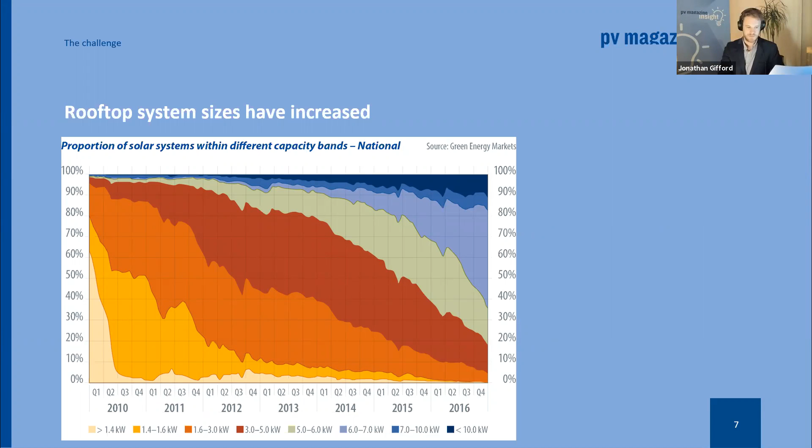And of course, as we know, rooftop system sizes in Australia have been increasing pretty rapidly. This is a historic chart again from Green Energy Markets, just showing how systems are going bigger. People are maxing out their rooftops. More and more small businesses are turning to solar for their energy, and some of these smaller systems that were installed under the various state feed-in tariff schemes are very much phasing out, a thing of the past. So this is all great news. Systems are getting bigger. We're installing more solar than ever before. But this is also the question: what kind of liabilities does that result in?

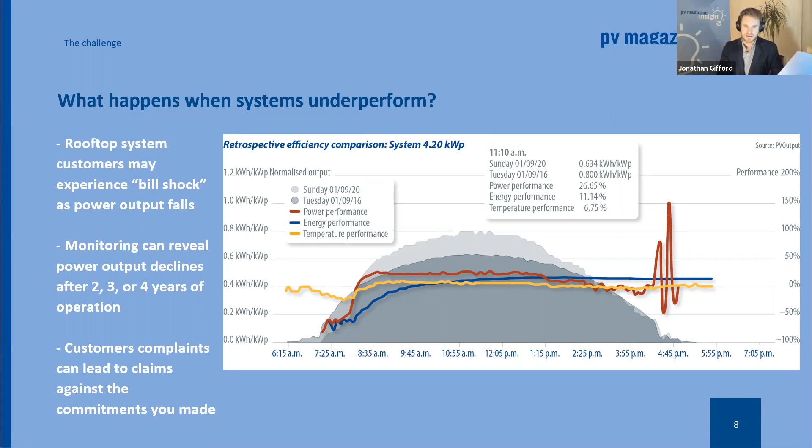So what do you do if this customer, maybe they get a shock on their bill, they're not monitoring closely, maybe they are monitoring closely, and start to see their power from the PV system start to drop off? What can be done about it? How can the faults be detected? How can things be turned around?

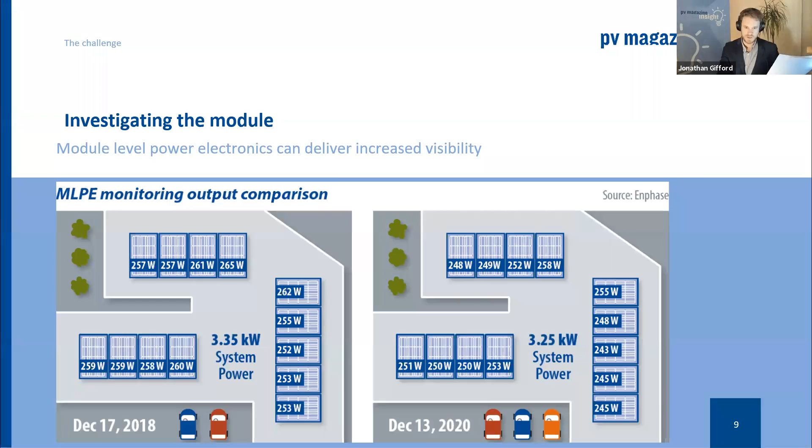Module level monitoring is a pretty powerful way of getting more insights into what's going on in the modules themselves. This is a little schemata that we've drawn up, but this is real world data. Here we can see module level monitoring on a relatively small rooftop system, but we can see over a period of 2 years that the power output from the modules is really dropping off significantly. And this is another indicator, or another level of insight into what might be happening if degradation is occurring. And we will be digging into degradation in quite a lot of technical detail throughout today.

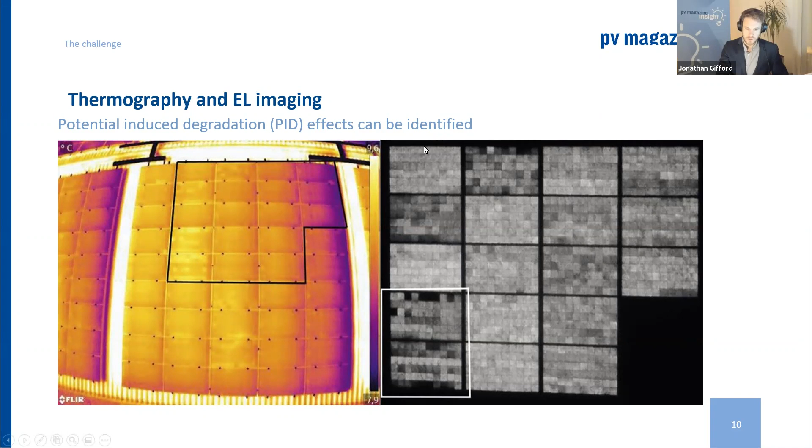Another tool that's available to installers and to our whole community in terms of fault detection and analysis is imaging, whether that's thermal imaging or EL imaging. And this is a nice example of some drone images that were taken from about 20 meters off the top of a rooftop array. And we can see how both the thermal imaging and in particular the EL imaging gives us some insights into how PID, potential induced degradation, is impacting not only a section of this rooftop array, but also a string. And I think that's really interesting to show the level of insight that can be gained from this kind of imaging.

Once again, I said we're going to be breaking down the event into 4 kind of subsections. First of all, we're going to talk fault detection and analysis and answer some key questions there. Then we're taking a really deep dive into module degradation. The module still makes up a big chunk of the system cost, and of course, that's where the power comes from. So we'll look into some different degradation effects and the latest research on one of the newer effects that we know perhaps a little bit less about. But of course, it's not just the module. We'll also look into BOS components, and we have some international experts to give you some insights there.

And then the business side of the equation. Warranties, how can we claim against manufacturer warranties or perhaps even performance warranties? The role of the distributor, key players in the Australian market. What does that mean in terms of risk mitigation and quality control? We're also going to look at liabilities and potentially the role of insurance, which I think is evolving quite rapidly in the global PV markets. Well, I did mention monitoring and module level monitoring, but let's dig into a little bit more of the data in terms of monitoring.

Our first speaker today really doesn't need too much of an introduction. I once heard one of the SolarQuotes guys say that Nigel owns shoes that are older than him, which I think is a little bit unfair, but he is very much a legend of the Australian solar industry. He now heads up business development with Solar Analytics, but he has a long history in PV production right back to the BP Solar days. Nigel Morris, thank you very much for joining us today, and I'll pass the floor over to you.

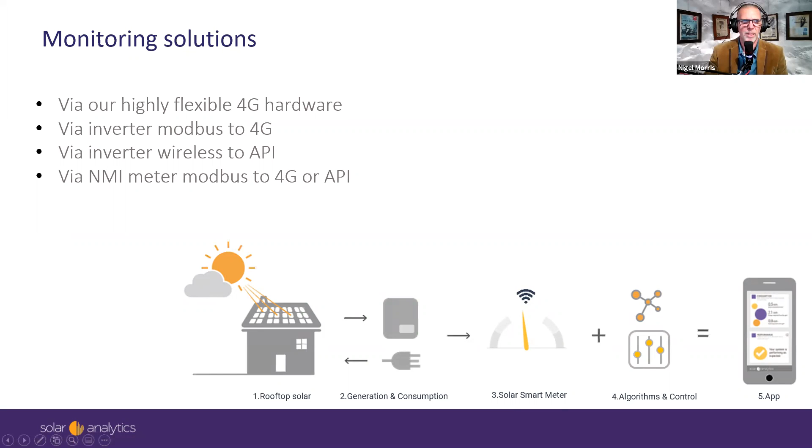And there we are. Now I've got a little control thing. There we go. My apologies.

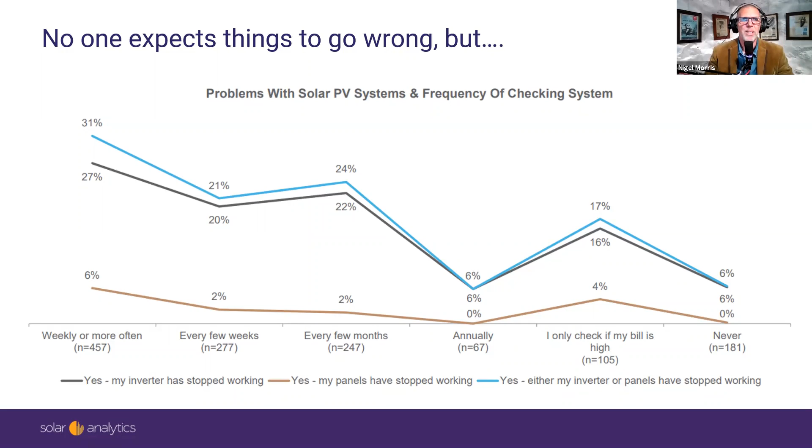I also wanted to set a scene here by going in and looking at our own fleet. In fact, the other day I downloaded a data set from our entire fleet of around 45,000 sites. It includes some very old sites and some very, very new sites. But one of the key issues here is how we determine what's going on using our own analytics and diagnostics. When we look at our fleet, we can see that about 70% are good. This changes on a daily basis, hourly basis, in fact. It's very, very dynamic. But using all our maths and algorithms and good logic, we can determine that in this case about 70% were working fine.

There are about 22% where we reckon there's something going on. We don't quite know what it is, but we can definitely detect that something's not quite normal. So we've sort of tagged them. We can see that some have comms faults, devices drop in and out from time to time, especially the older ones. And in this case, only 1% of our systems in black and white terms could we actually determine had a fault when I looked at this data. These will move from category to category as our diagnostics and algorithms do their thing, of course. But this gives you a pretty good representation.

Just to add some more qualification to this, we recently had one very, very large customer of ours with a fleet of several thousand sites who said, look, we're a bit worried that we've got some issues going on within our fleet. We've got some alerts and notifications coming out. Could you have a look? When we looked individually at their fleet, which was about 1,300 odd sites, we had almost exactly the same breakdown. So whether it's an individual fleet or the entire fleet, we see pretty common statistics. So we think this is probably indicative of what's going on out there in the market.

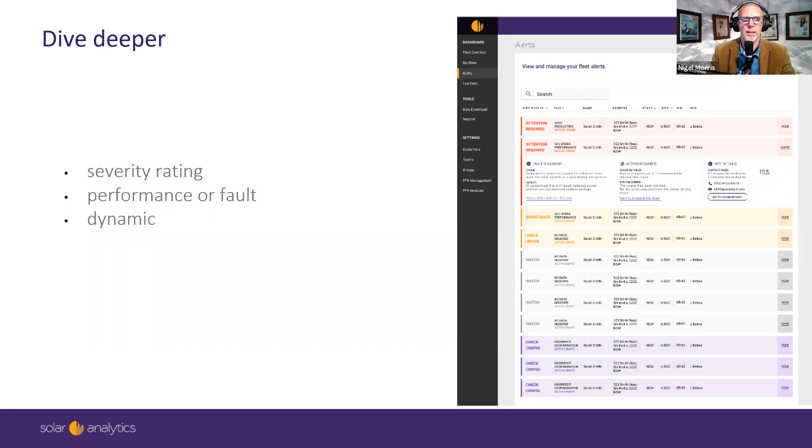And a reminder, of course, that all of these things are highly dynamic. We see faults come and go. You'll have networks that go up and down. You can have extreme weather events. We had one in Brisbane the other day, which showed up on a lot of sites. Performance is an area that we really focus a lot of attention on. And performance is really the crux of all of this.

What is normal? That's the question. What is a normal system? What should it be doing? There are around 20 variables. I'm not going to read through them all, but there are a huge number of variables that can make a system perform.

Yes, Frederic, I will wrap it up. I saw your message. Thank you. I'm going to be very quick now.

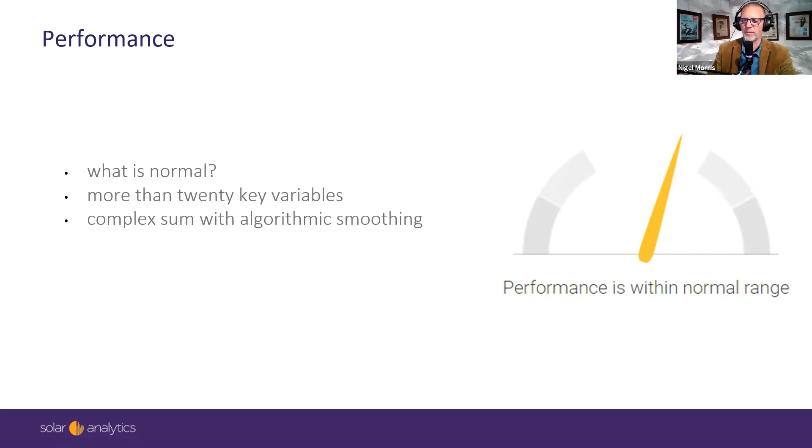So there are lots and lots of variables. There's a complex bunch of sums that we use with algorithmic smoothing and a whole lot of other things, but there are all sorts of variables that can make a normal system behave abnormally. Some are typical things that you'll see, and some are not. I'm going to skim through my slides, but obviously long-term trends are something that we look at very hard. This is an example of how we can see some of those long-term trends.

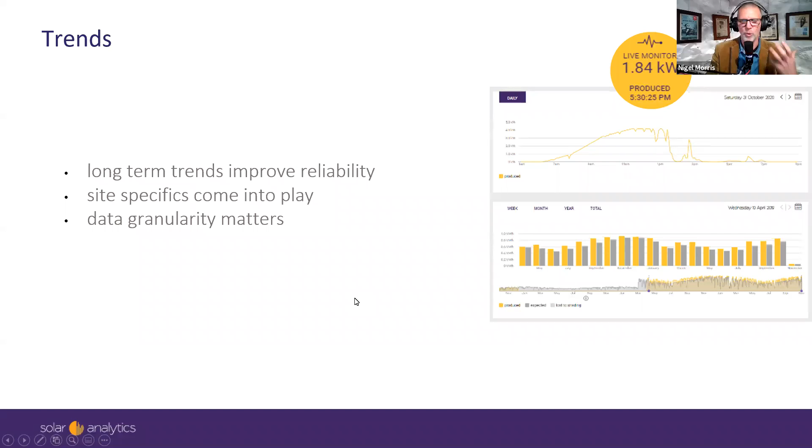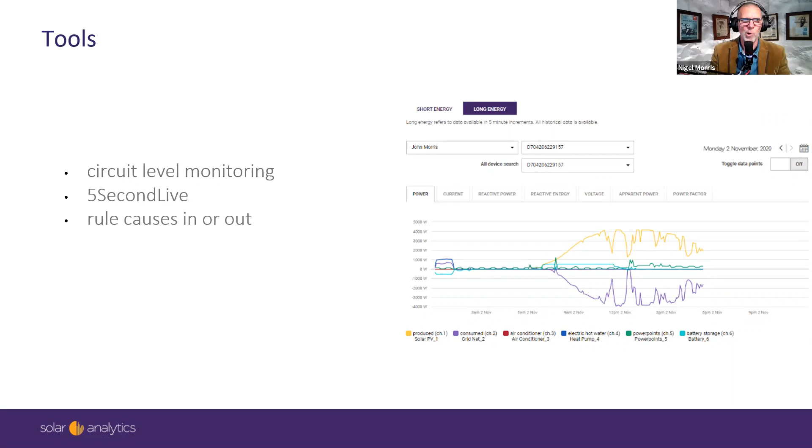Site specifics obviously come into play, and we really believe that data granularity really helps. We can go down to 5-second data as an example. We can go into circuit level monitoring. These tools can be used to help rule causes in or out, which is the key. And of course, testing solar modules, there are all sorts of variables around testing solar modules. There's equipment tolerances, there's accuracy and calibration requirements. There's all sorts of external factors that you'll hear from a whole lot of PV experts later on.

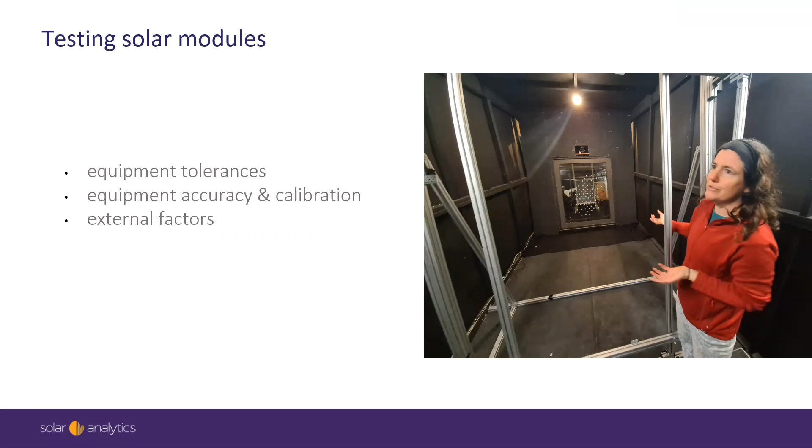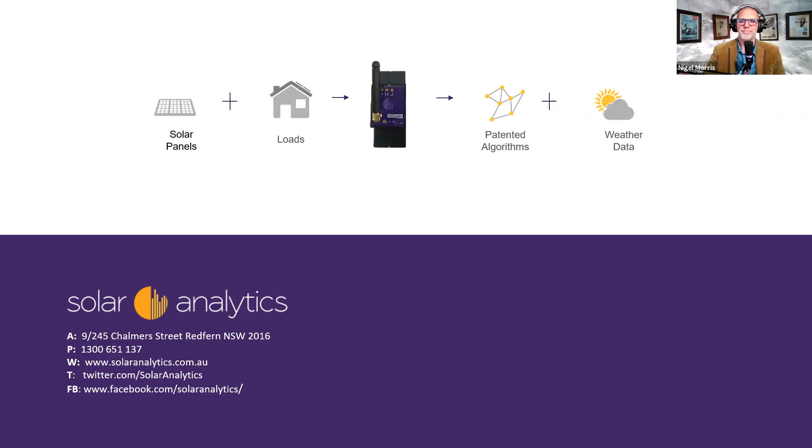Thank you, Nigel. I just see a bit of a frozen screen, but I'll keep pushing forward.

Thank you very much, Nigel Morris from Solar Analytics. So a lot of variables that can be shown up by monitoring tools. Interesting to see that the inverter is frequently a cause of failures, but let's go further into the module

while we're talking modules. Our next presenter is George Touloupas, who has a long history in PV manufacturing on the technical side, also on the technical side of project development, but now he is the Director of Technology at due diligence and engineering provider Clean Energy Associates. George joins us from Athens today. And George, you're going to provide us some insights into degradation and some of the issues that Nigel raised in terms of collecting information and making a warranty claim. George, over to you.

Hello, good morning and good evening to everyone. From Athens, it's pretty early here, but I'm very glad to be on this session, another quality roundtable, which I've been attending for the last few years with PV Magazine. Very few words. Trying to get this to advance.

On Clean Energy Associates. It's a technical advisory and quality assurance company. We've been around for more than 12 years, more than 135 professionals in 12 countries worldwide, physical presence, and a very impressive 65 plus gigawatt of track record and experience for solar and storage projects.

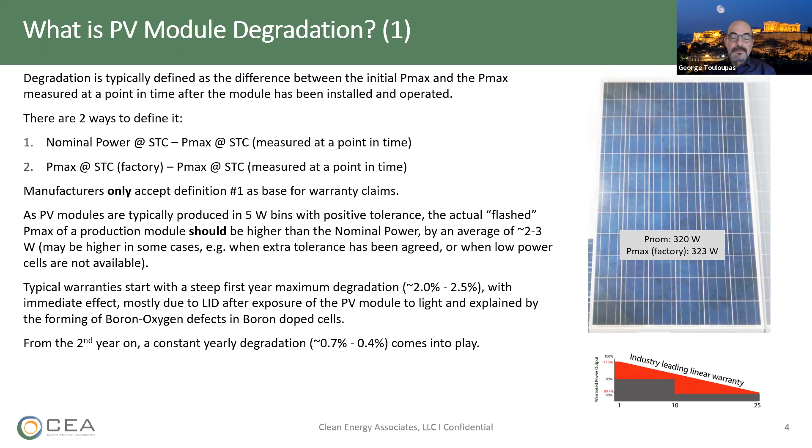But if we look at what might happen, so there's a bit of a lag. Okay. When we see a problem, we're trying to measure the power and see if we can file a warranty claim. There is this so-called measurement uncertainty, which cannot be gotten to zero, unfortunately, even if the lab goes to great lengths to calibrate the flasher and use reference modules and do all kinds of corrections, which of course increase the expense of measurement. So typically in the warranties, all the manufacturers are asking for the testing equipment, they call it tolerance, but it's really the measurement uncertainty, to be applied on top of what is measured.

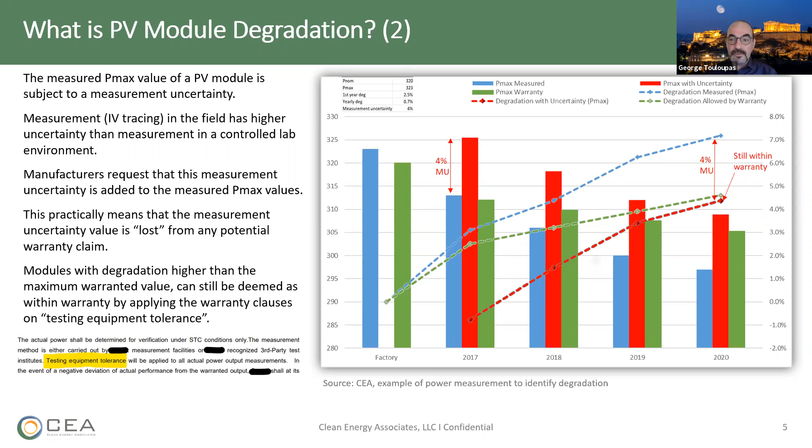Of course, 4% is pretty high, but if we are using an IV tracer in the field, it's 5% or even more. If we go to a really good lab, maybe we get 2 to 2.5%, but getting lower than that can be very difficult and expensive as well, because we have to measure quite a few modules to get that.

So why do modules degrade? It's a natural process. Everything dies eventually, including modules. It's not linear. This is an abstraction. There are lots of things that can go wrong. But of course, we have to avoid the early infant failures by doing the necessary steps. But even then, we might see degradation coming in midlife of the module. This is from IEA's PVPS document. We have added LeTID, which was not known at the time.

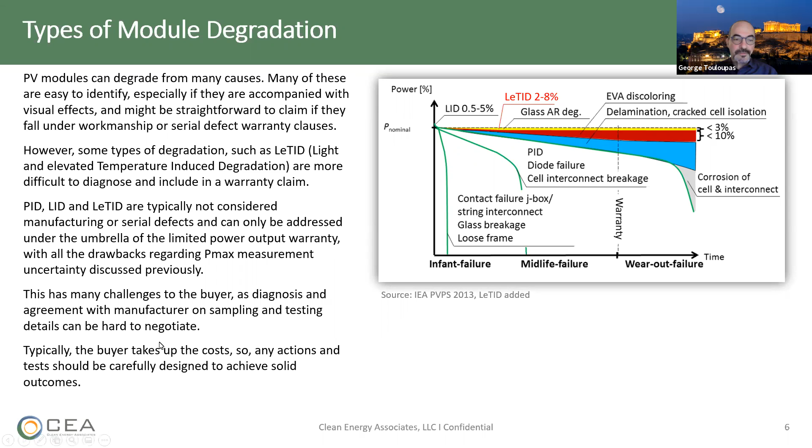And it's typically pretty difficult to detect and file a warranty claim. And degradations like all the Ds, let's say, potential induced, light induced, LeTID, are not considered as manufacturing defects or serial defects. So everything has to be negotiated, including sampling, etc., from the manufacturers. And the buyer takes up the costs.

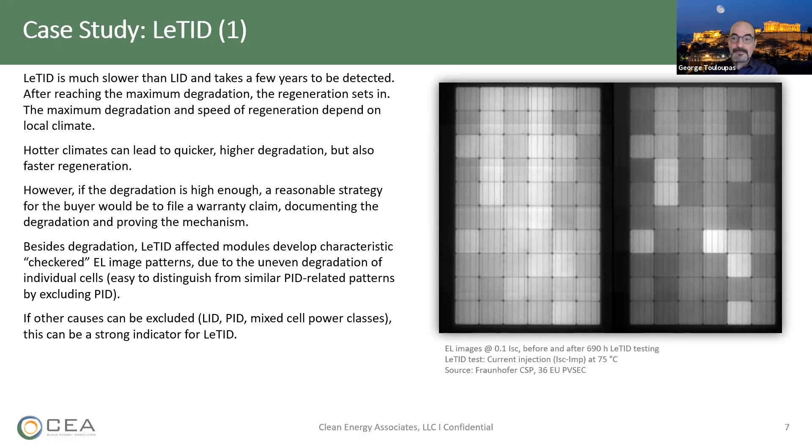So in this case study, we're looking at the buyer who has several PV plants, and we have actually found there is degradation, underperformance. We found some telltale effects where checkered EL image patterns have been detected. We have excluded PID or even LID or mixed power classes because there has been quality assurance during the production, and we've done all the testing and the checking of the modules. So everything has been excluded. So the very probable root cause is the LeTID.

And by doing some lab testing, we're able to identify that the spare modules degraded and the degraded module regenerated. So right now we're in the process of negotiating with the manufacturer on remedies. So even for very difficult degradation causes, there are ways to go around and do the diagnostics and get the warranty claim in course.

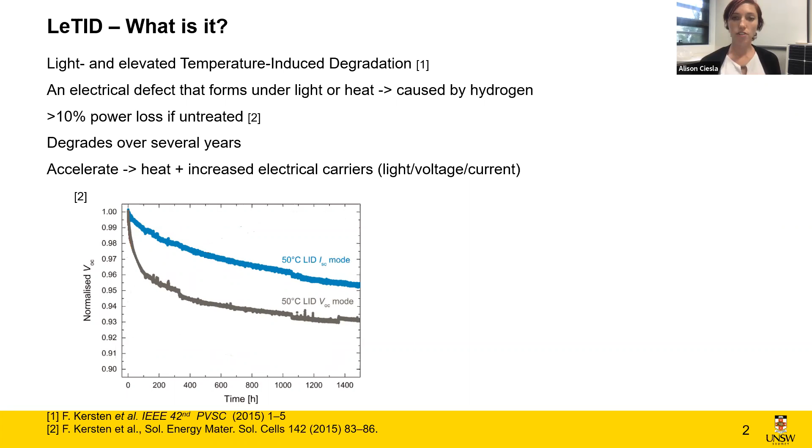So if we increase the heat and illumination, we can accelerate the degradation. So this obviously has implications for what you would see in the field in different climates around the world, but it also means we can accelerate it in the lab to look at what would happen in the long run. And when we test at higher temperatures, sorry, I'm having some troubles clicking screens, we can actually see that if we accelerate it enough, we see a full degradation before essentially a full recovery under the same conditions that cause the degradation.

So what else do we know about the degradation? It's very, very variable. Even minute changes in cell processing conditions can cause drastic changes in the behavior that we then see. So if we look at the change in voltage of these cells that have undergone thermal treatments with only 25-degree difference, you see some degrade very quickly before recovering quickly, while some degrade quickly before recovering slowly, and others just degrade slowly indefinitely.

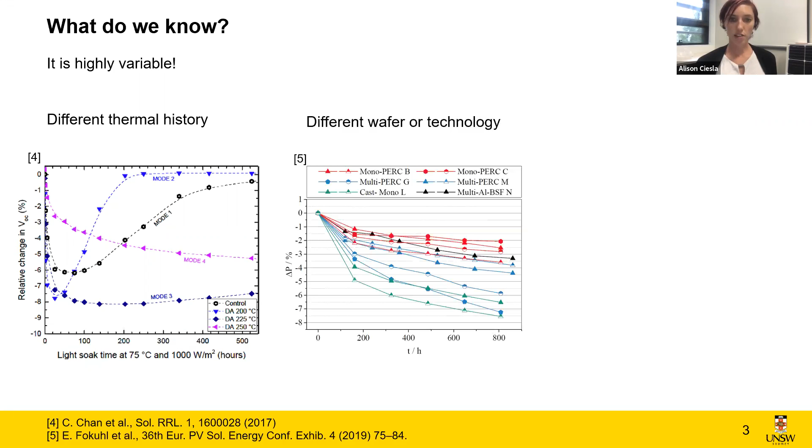So it's therefore not surprising. A recent study was done testing a number of modules that found that the degradation was highly variable between different modules made on different wafer types or different cell technologies, and similarly, very different degradation even on modules made from the same wafer type and technology.

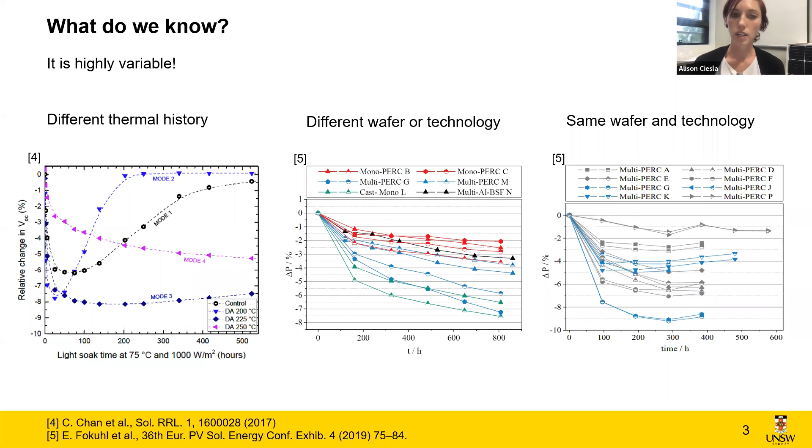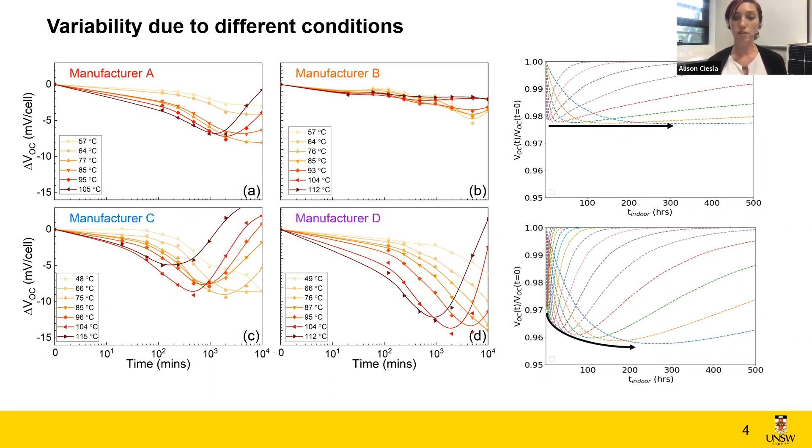It's also very variable due to different conditions. And surprisingly, I just saw in George's slides, he mentioned that with higher temperatures, we see more degradation. But in actual fact, recently what we've seen, I studied 4 different manufacturers' modules at different temperatures. These are from the market 2 years ago, so they're not the most recent modules. But what we saw is that some of the modules showed the same amount of degradation no matter what temperature they were tested at, and some actually showed increased degradation at lower temperature, which is more representative of the majority of field conditions. So that is quite surprising, but also makes it much harder to predict what will happen in the long run.

The other thing you'll notice is that all of these manufacturers I tested have very different amounts of degradation. And the only one that could be considered stable would be manufacturer B. They would be the only one with a treatment. And I would hope that if I tested modules from the market in 2020, much more would have stable or minimal LeTID as that manufacturer does.

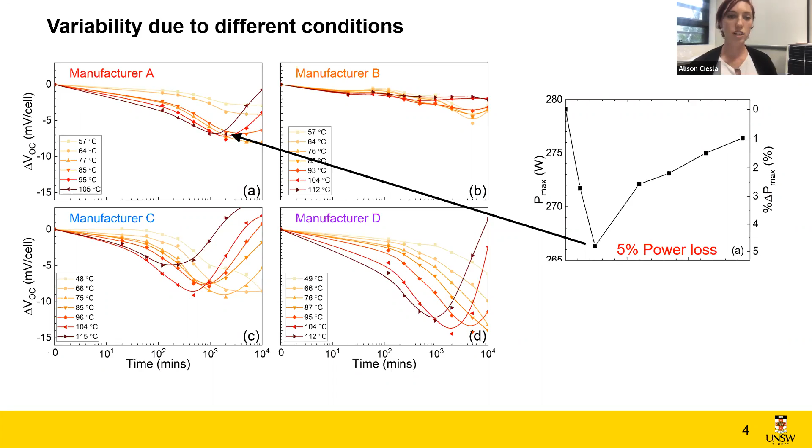We now know of multiple ways to treat the degradation, and some methods can be as simple as a thermal process that can be applied after the cell is even manufactured, which is much easier to apply before the cells are encapsulated into the module. So manufacturers of modules who buy cells imported can actually apply a treatment to make those cells stable prior to encapsulation into a module to ensure they would be stable. But again, due to the variability, these types of treatments need optimization regularly every time a process is changed in manufacture.

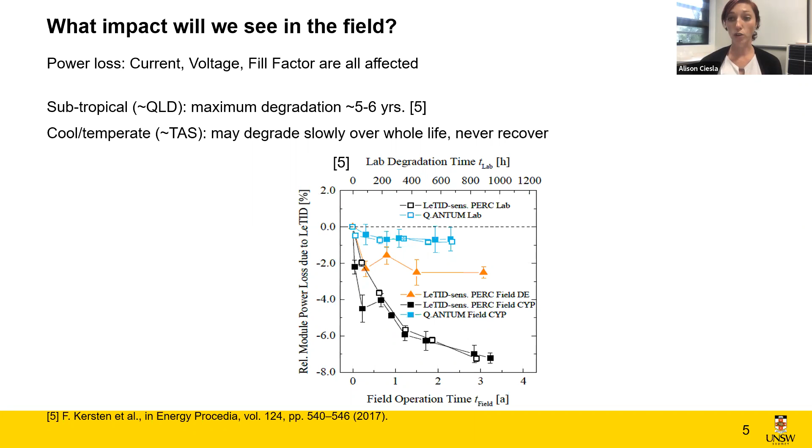But so what impact will we see in the field? All parameters of the modules are affected: current, voltage and fill factor. I've briefly mentioned what will happen in different climates, but essentially in a subtropical climate like Queensland, you're likely to see a maximum amount of degradation within 5 to 6 years before it starts recovering. Whereas in a cool temperate climate, more like Tasmania, it's likely to just degrade over the whole life and never fully recover. Well, that's just a simulation. I'll skip over that in the interest of time.

But this is a particularly interesting study that came out recently looking at 6 arrays of modules from the same type and manufacturer in America in a fairly warm climate. And 5 of the 6 module arrays degraded fairly significantly. But interestingly, it's hard to detect this in the short term because of the huge uncertainties mentioned by George, as well as weather fluctuations and all kinds of things. You really need multiple years to detect this, even in a warm climate. But that's not to say it's not significant, and it will cause a significant amount of power loss over the life of the module.

So testing is now becoming a thing. So TÜV Rheinland, I know, offers some certification, which will provide some confidence that there is not excessive amounts of LeTID, and there are new IEC standards on the way. But these standards are all a bit limited in that they are sort of pass-fail. And these modules that only degrade about 1% per year are likely to slip through this test and be considered a pass, but yet we don't know from this what the long-term degradation might look like. This could still be really significant over the life of the panel. We don't know what the recovery behavior will look like, whether it will be quick or slow, and ultimately what the impact is.

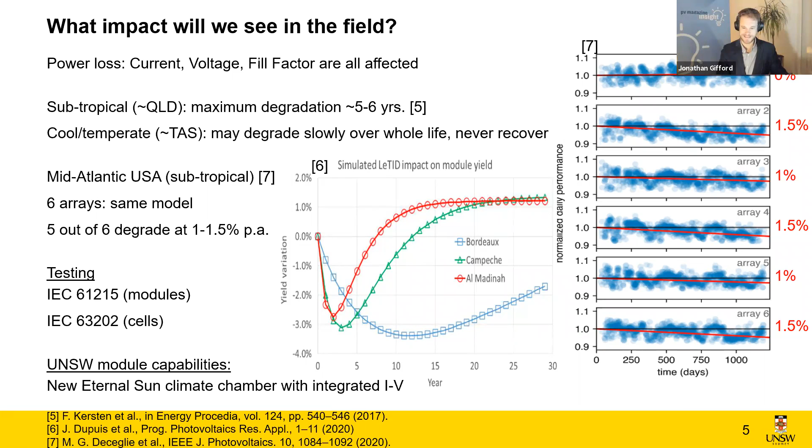Thanks, Frederica. Perfect. Thank you very much, Alison. It's kind of equal parts encouraging to see progress being made in manufacturing, but also a little bit terrifying to see how much we still don't know and how very differently LeTID can affect modules in different climates, and they may not recover at all in certain climates.

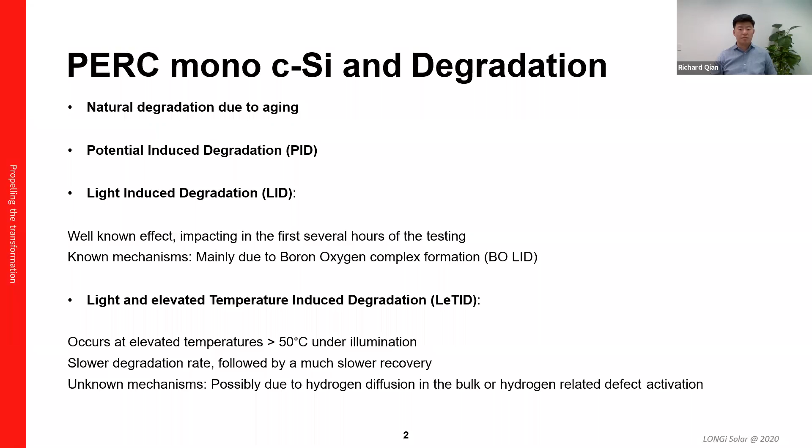So one of the advantages from a highly integrated manufacturer like LONGi is that we can control and manage risks in every single stage, from wafer, cell to module manufacturing. We have been committed to monocrystalline silicon for over 20 years, and a lot of R&D effort has been put into overcoming degradation. For example, we teamed up with the UNSW to commercialize the hydrogenation process that can effectively mitigate LID. This technology has been employed since our first generation mono module product, Hi-MO 1, back in 2017. At that time, we could already offer an industry leading low degradation performance guarantee, which was a great step towards a booming of P-type PERC mono.

And this year, we scaled up the gallium doping technology on our silicon wafer to basically replace boron as a dopant, which can also effectively prevent LID and LeTID without increasing cost or sacrificing the performance.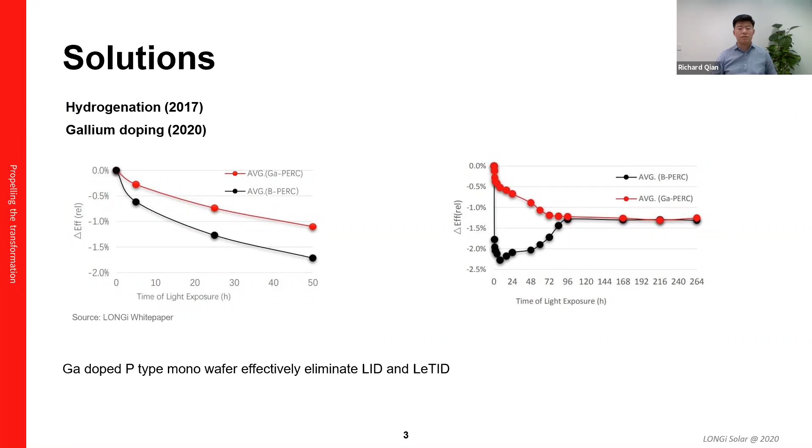So one thing that we need to remember is that when it comes to module assembly, picking the right material is extremely important. What we do is that we select and verify new material combinations through advanced processes that involve numerous modeling and testing. And we only work with the most reputable and reliable suppliers to minimize the risks, but still put in place strict incoming quality control. It's also verified by different third parties, not only under standard test condition, but 2 or 3 times accelerating a longer time in the test chamber.

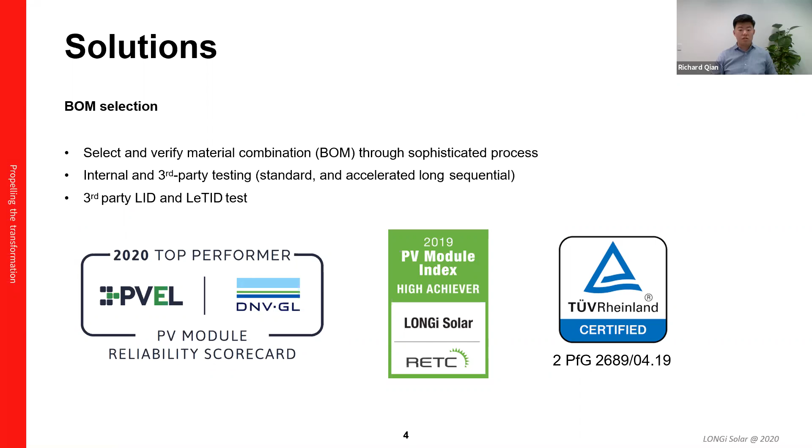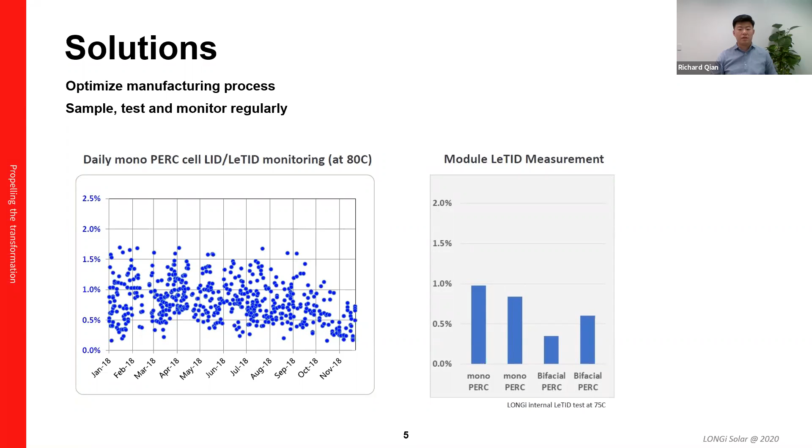We've been awarded the PVEL Top Performer and the RETC High Achiever, for example, and we are also certified by TÜV Rheinland on the anti-LeTID with their 2 PfG standard. On the production line, we also sample and test the final product frequently. This is an example of LID and LeTID monitoring result. It's been less frequently performed currently compared to a couple of years ago, as we are now much better in terms of mastering the techniques, and also supported by a comprehensive quality and process control system.

So all in all, we agree that the performance in the field is what matters most. This is the latest PV Magazine test results. It's been kind of a competition since 2018 between different suppliers and technology. You can see that both LONGi's bifacial and monofacial module is at the top of each category. And it's even better than some of the N-type modules out there as well.

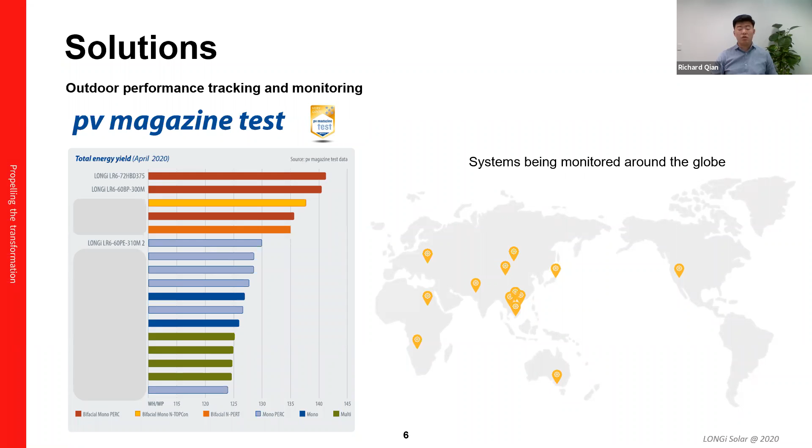We've also got real projects around the globe that are being monitored, from a few kilowatt to tens of megawatt in size, for not only energy yield but also the degradation rate. The feedback we have received so far demonstrates that the average degradation rate is much lower than what we guarantee. So as I said, we are overseeing the whole process and making sure that there are no loose ends that are out of our control.

Just to finish, the after-sale service has become a critical part in our business. We have an experienced and readily available team here based in Sydney, Australia, so we can respond to issues in a timely manner whenever they arise.

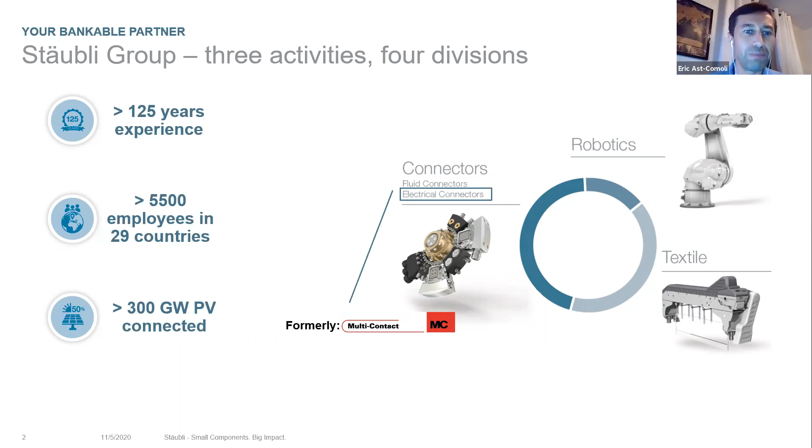So yeah, I'm from Stäubli. Just trying if the remote control is working. Yes, so I don't want to speak much about the company, but we are a Swiss family-owned company with more than 125 years experience. I'm in the electrical connector division, formerly known as Multi-Contact. PV connectors are well known as MC4 types, which stands for Multi-Contact. And for the history, why MC4 and not MC1? It was because the contact had a 4 millimeter diameter.

Moving ahead with some real case studies and what I've been seeing in the field, we like to say you can't manage the unknown. We have seen over the years that, being known as the original maker of PV connectors, a lot of complaints come to us because everyone calls the PV connector an MC4, so we see a lot of complaints whenever it's related to connectors, even when it's not our products.

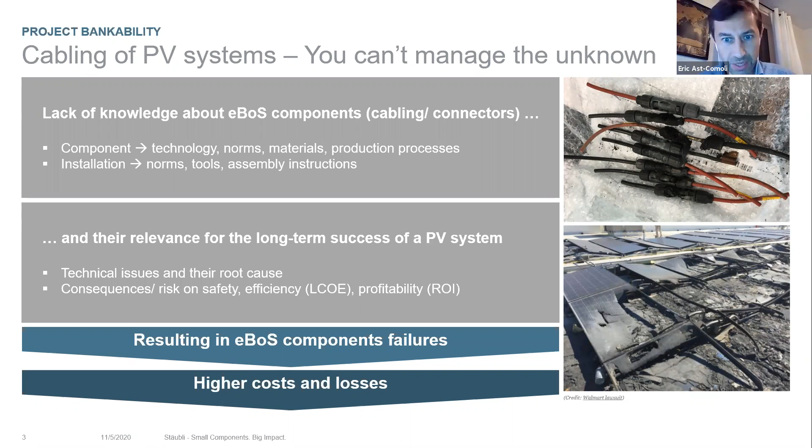And after all our experience, we like to say you can't manage the unknown, because a lot of people put a lot of attention on modules and inverters, but less attention on BOS components, and not only components, but also the way you install and use them. That's why we see it having a high impact on the profitability and the LCOE, as well as risks and issues, as you mentioned with the Walmart case.

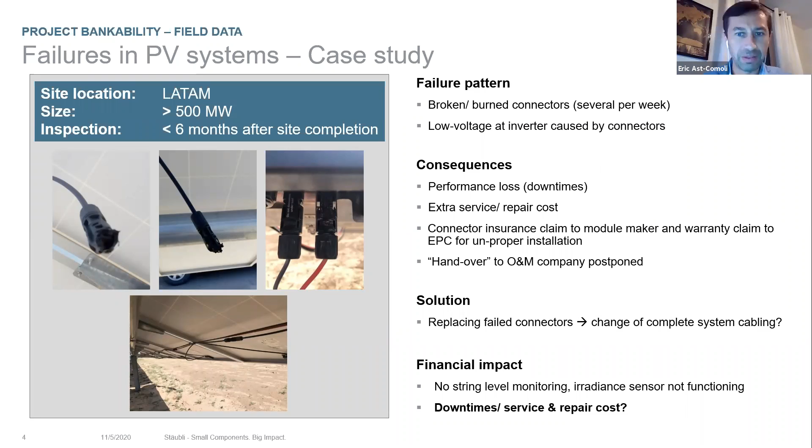When we look at the next slides, on such a big system, after a really short period of time we identified a lot of problems caused by the connectors. But checking all connectors one by one requires long efforts and a lot of manpower, impacting cost at the end of the day. And when high temperature is there, it's quite clear that you'll eventually have a fire or defective connectors.

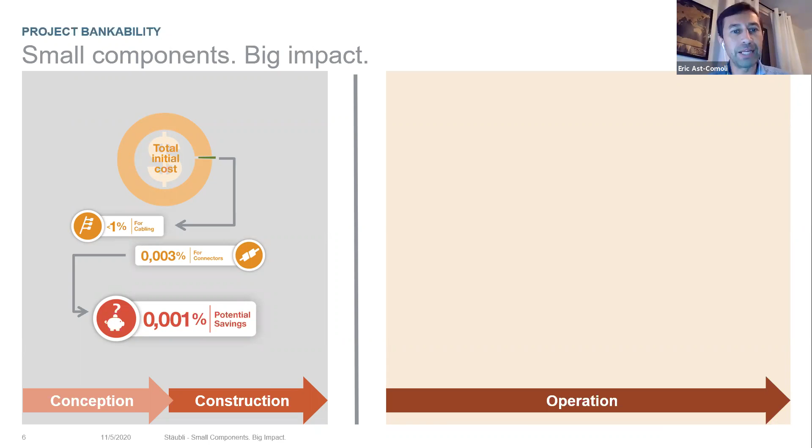So considering the impact of the connector on the total initial cost, it's really low. So it's important to pay a lot of attention to components right at the beginning when planning your system, because over the years you'll see big problems occurring with a high impact on cost.

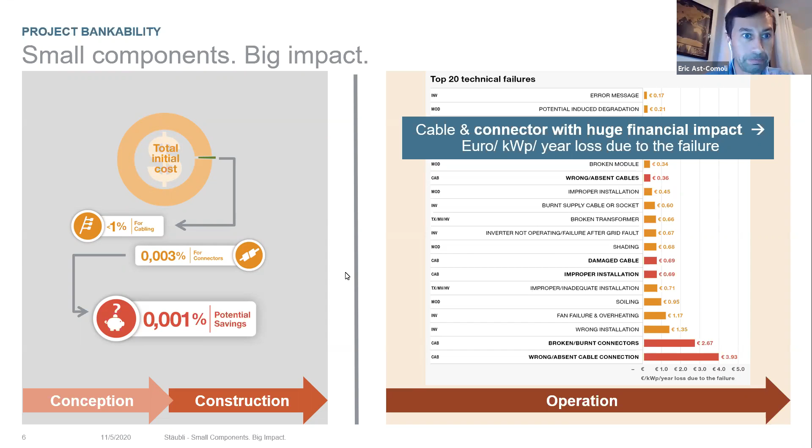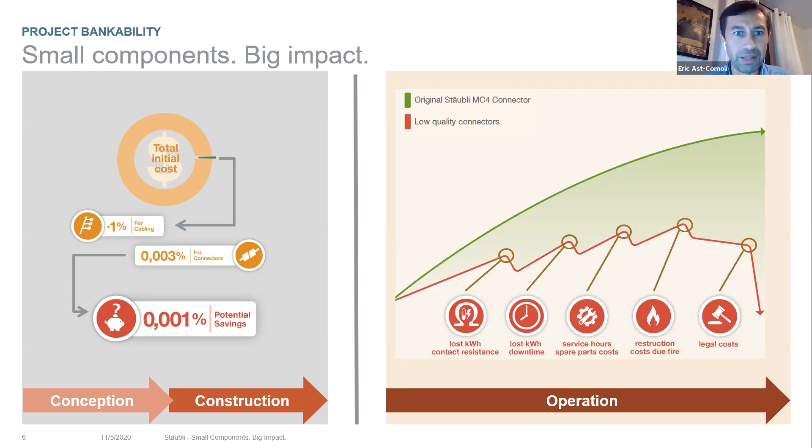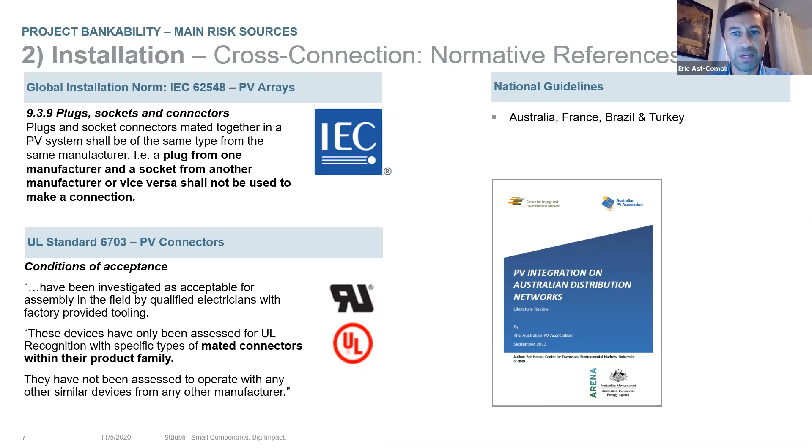So here again we see some of the issues that come over the lifetime of the system, and why it's important to pay attention to connectors and products. Again, cross connection is really important. Australia is well developed and advanced in this regard, since this cross connection topic has been in place for years, but still we see in the field people cross mating connectors. And I'd like to end my presentation by being a little bit fast here.

Yes, we've been asked by an asset owner to assess a plant that was already up and running for 5 years, looking at the system and the whole cabling. What we realized is that connections between modules were all of the same type and using the same connector, what we call the original connectors. And at the end of each string, we had cross connection, so the harnesses collecting all the strings were using different connector types.

So we cut some samples from both module-to-module connections with original MC4, as well as connectors at the end of each string, and we did some testing to check the performance after 5 years. In theory it's quite obvious: on one hand, contact resistance is highly impacted, so it impacts yield and revenue at the end of the day. But if we look at insulation resistance, which is more of a concern when it comes to safety, we have seen levels where it's even dangerous for people if they come and touch such a connection. It could not only hurt but really be terrible for people.

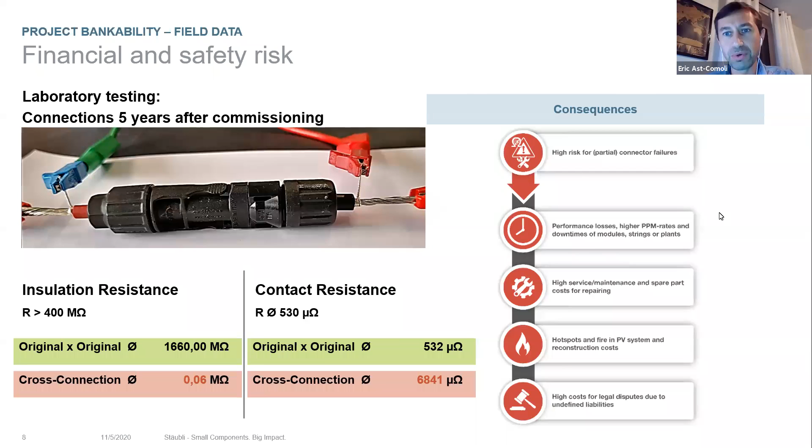So once again, you can't manage the unknown, so it's really important that you pay attention during planning, during the conception of your system. It's important also that you make sure your partners, EPC companies and people doing the installation, are well educated, because very often we see misuse even when good products and good components are selected. So it's really important that people are well trained, and when things are done properly, we can save a lot on the operation and maintenance side, and basically improve the LCOE of your system.

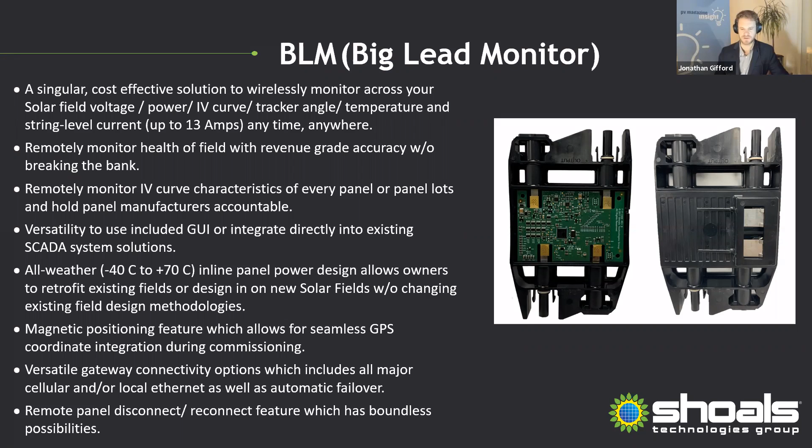Eric, we have a question about temperature in terms of connectors. Naturally, up on the Australian rooftops in many parts of the country, it's going to get bloody hot. What kind of impacts do you see there in terms of the connectors?

No impact at all. I mean, if we look at the data sheet of our products, and especially the kind of materials we are using, they can work and are tested up to 105 degrees C. So it's absolutely not an issue.

Okay, but thermography can be an important tool for either preventative maintenance, like Ben was touching on, but also fault detection. Is that right? Yes, it's a good way to look at it. Yes, absolutely. Okay, and why is that? Because the connectors will show up as, you know, burning hot.

Yes, when contact resistance is increasing, typically, then you have increasing temperature of the connection, and when temperature is increasing it means you're losing energy. So the question is then, is this temperature increase related to the environment or to the physical or the mechanical connection of the system?

And I think the example of Ben talking about the veins or the backbone of the system is really interesting. We also really like to compare the connector with a tire on a car. You rather pay attention to the kind of tire you have on your car, and it should fit the kind of car you have, and that is really important. And no one will ever mix different kinds of tires on a single car. This won't work. Yeah, good analogy.

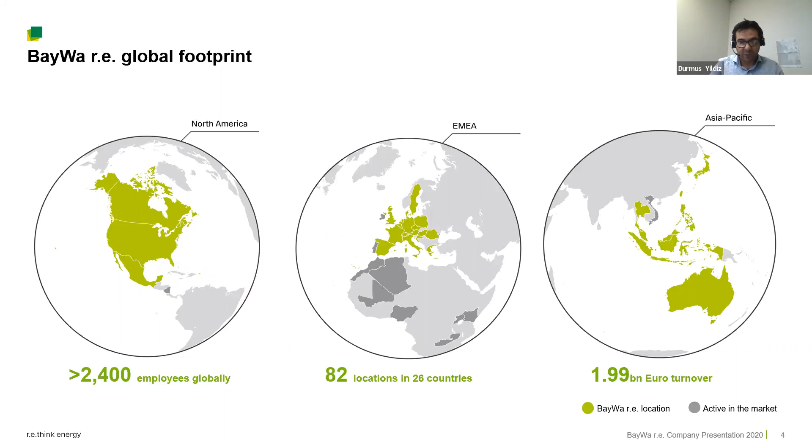So who are we? What role are we playing, and why do we care about quality? I'll give you a couple of hints. As Jonathan said, I've been doing this for a very long time, 20 years, and for a couple of years now with BayWa. Very quickly, it's a large company, and it will tie in later with one of the other slides on why it is important when you're large, and what you can do for the quality of the supply chain.

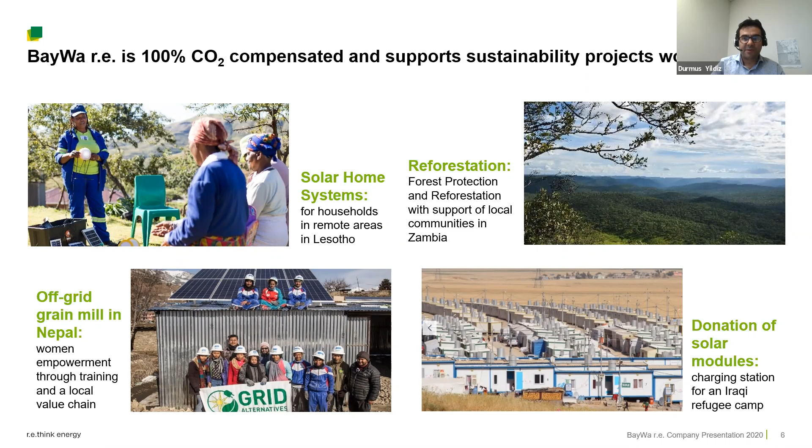We in Australia have 3 offices and multiple warehouses, but what is very nice is to be part of a company which is actually a CO2 compensated organization, and we also do some nice things around the world, which actually feels good. And that was the reason why I started in this industry.

Now, what is our role? You have seen these presentations, which are extremely technical. And I think for us, it is to a level of due diligence, because we do take the financial risk when we buy and sell these products. So for us, we of course don't want to be exposed. So we're trying to do that due diligence and see which companies we can work with.

That obviously sometimes takes time to analyze, and also to find out all these technical aspects and discuss them internally. Because we are so large, we can talk to different countries and different regions where we have different experiences. And another nice part of the due diligence is that because we develop large solar farms as well, we can have input from that end, and we also operate solar farms and have input from that aspect as well.

The other role is product security. You can often have a better chance to get to a manufacturer if you buy from a wholesaler, because of the aggregate amount which wholesalers buy. There is a bit more power behind that. Replacement of products can be easier should there be a battle. Does this work? Doesn't it work? There is a certain level of leniency once you know customers and you determine that their claim is actually valid.

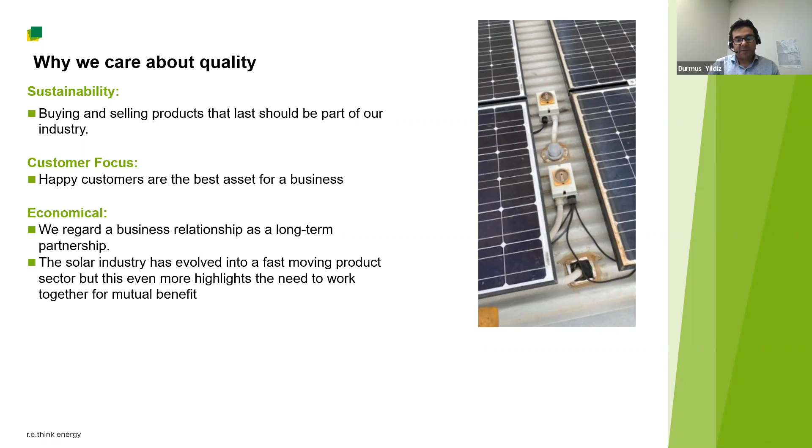And the other one is an economical decision. Obviously, I think some of the people in Australia who are on this call know what a volatile industry this is and how many companies have come and gone. But I have seen quite a few companies who bet on quality that are still there. And I think that is an important part. If you stick to quality, you can stick around for a long time.

Just a couple of pictures. I wanted to start my stopwatch, so I'm not sure. Please let me know when I'm going over time.

But I thought I'd have a look on the web at what I find with solar modules. As much as the focus was on solar modules, we do not get that many calls for solar modules. But because everyone says a module is a module, all the presentations before me have actually shown that's not the case. And I think that's what I'm trying to say to our customers as well. There are so many little items in a solar panel which can go wrong, which are forgotten. And that can be the hotspots, the delamination, and all the other things which I have just listed there, which are often not seen. Besides the fact which Alison probably has spoken about, which people are not even going to that level, there are some obvious items, the individual components in a solar panel.

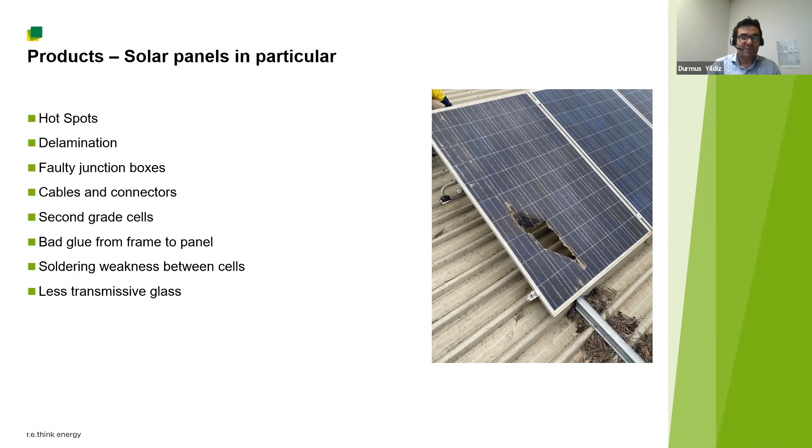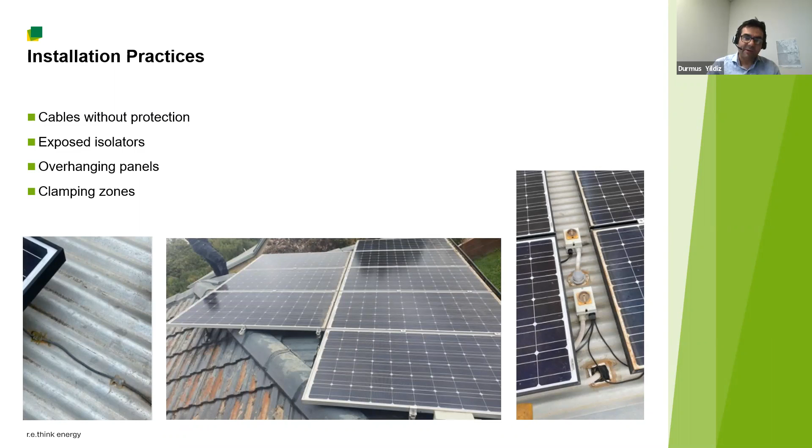Then going to a lot of other things which have been said before, the balance of system components and also installation practices have been brought to our attention. It really is one of the biggest issues I find in Australia, that there are still very bad practices here. And we can see how cables are laid, how you don't adhere to clamping zones, which can have an effect. And it does then flow on that, oh yeah, it's not working. And often the manufacturer does not know what the background of this is. For example, here, all these installation practices are really the wrong use of actually a well-manufactured product.

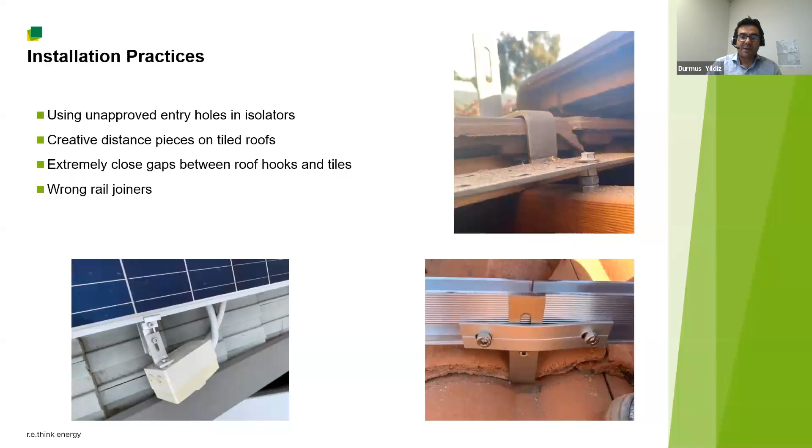And the result is, I mean, the cabling was mentioned before. I have seen cabling where it's unbelievable that it works. And again, the responsibility for us is, this is also now a fire-causing system as well. So it's not just that it sits on your roof and if it fails, it just doesn't do anything. It can actually be quite harmful and people can get killed.

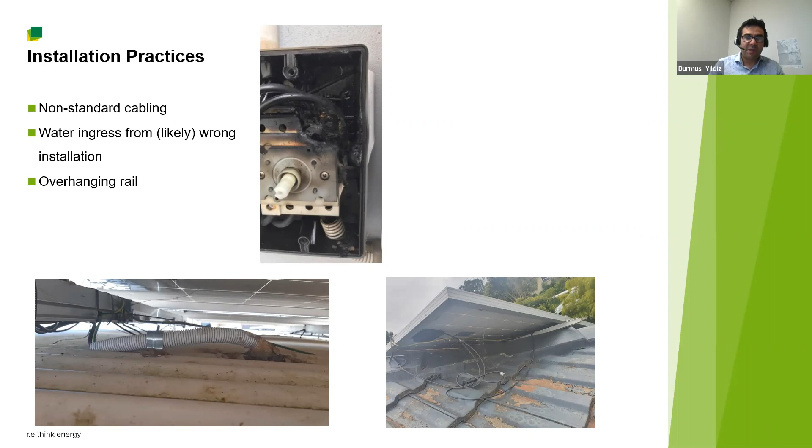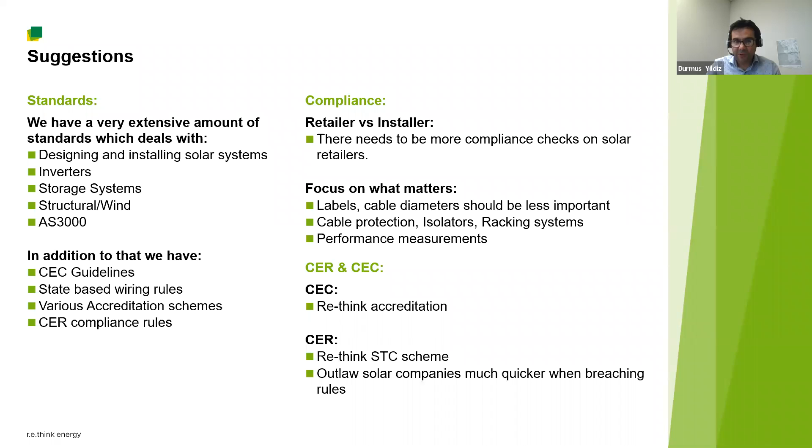I think there are a lot of ideas. We can discuss that later, but I think we have the standards, we have the guidelines, we have accreditations. What is needed now is maybe more thinking on the compliance scheme, and maybe changing some of the schemes we have towards a kilowatt hour based remuneration of installation, and not just a blunt payment of a number of dollars for an installation which is not done correctly and may not work after year 4 or so. That would be it from my end.

Well, that's a huge issue to finish on. Durmus, talking about the STC program, perhaps we can have a whole event based on that debate in itself. So thank you very much for that presentation, Durmus. Some of those nightmare photos of installations and failures always capture the attention.

Now, moving on to our final presentation for today, Jan Naparakowski has been very patient, and we have mentioned a little bit about liabilities as this growing market and these growing installation volumes come into the market. What kind of liabilities are installers and different market participants carrying? We have a question for Durmus. He'll come back into the conversation a little bit later, but Jan, I'll pass the floor over to you, joining us from Hong Kong.

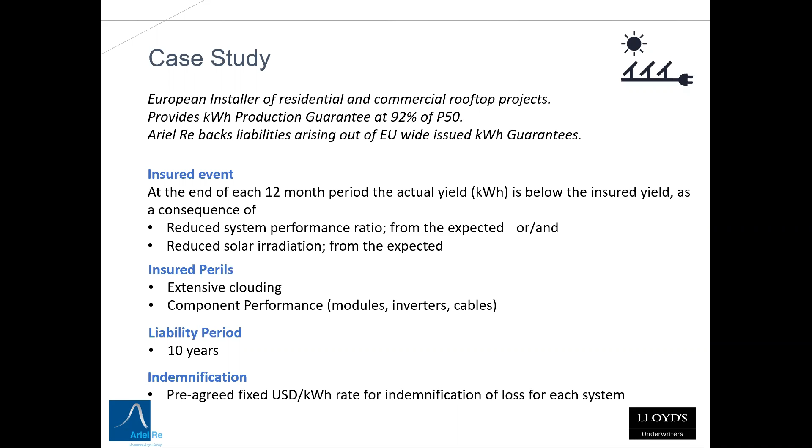Now, in order to get there, it's important to really look at the entire portfolio. When we underwrite a 100 megawatt system, we just focus on this one particular system. If we underwrite a portfolio of 2,000 rooftop installations, we cannot underwrite 2,000 small systems. So we have to agree on a methodology with the installer or the O&M company on how they predict their kilowatt hour calculations, what are the pre-agreed locations, because we have to map projects into different locations with different irradiance volatility. We have to agree which source of GHI and shading methodology is being used, and we obviously have to make sure that the balance of the system, including the bill of materials of the components, is up to our spec.

And very importantly, going forward in the operational phase, we need to agree and endorse the O&M plan, as well as agree to a live monitoring analytics software, which the client will use in order to verify the claims. And then based on this, we'll define the policy terms, which will be a policy period. For example, all the systems installed, built, and commissioned within 1 or 2 years will be ceded into the policy automatically and insured for a period of 10 years.

And the premium has to be also simplified. Once we went through all our underwriting milestones, we would just define an amount of premium per kilowatt hour. And at the end of the year, we would just see how many kilowatt hours were guaranteed to all the systems, which would result in the final premium.